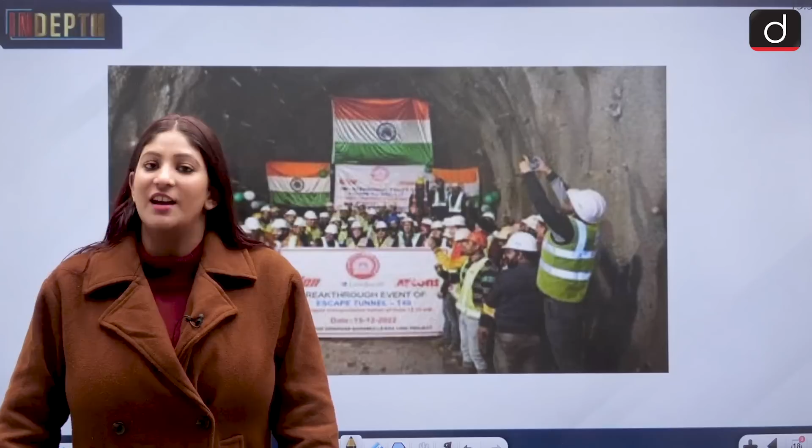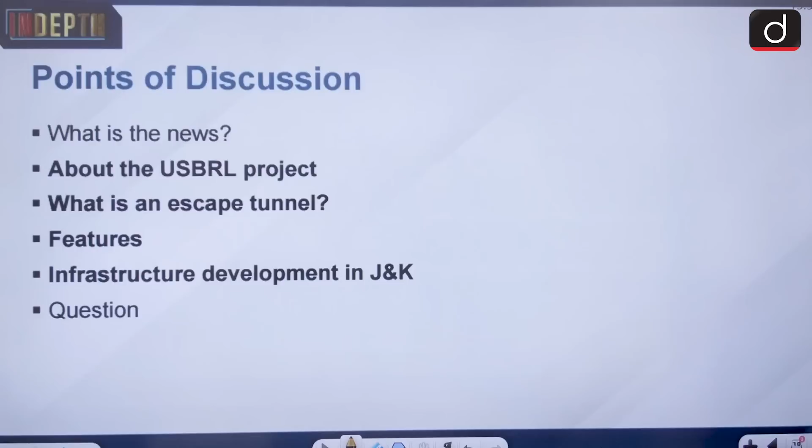India has got its longest ever escape tunnel in Jammu and Kashmir. This achievement has been registered by railways. Let's know how. This topic is important from the perspective of GS Mains Paper 2nd and 3rd, and also has preliminary facts. This segment is pretty data based.

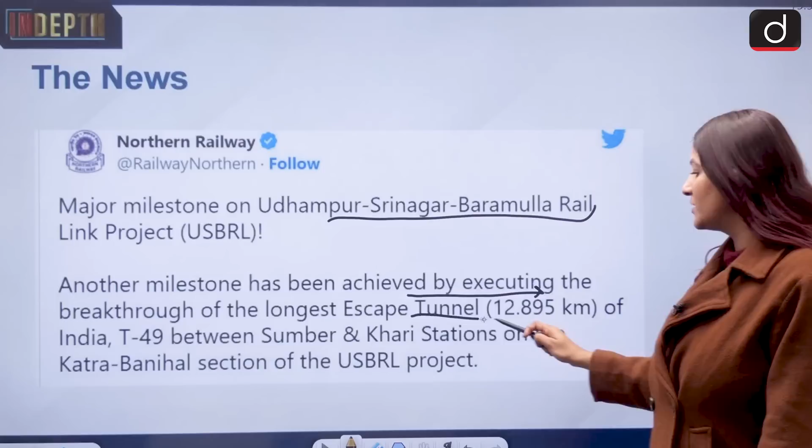Major milestone on Udhampur Srinagar Baramulla rail link project. Another milestone has been achieved by executing the breakthrough of the longest escape tunnel, which is 12.895 kilometers long of India, and it is T49 between Sumber and Khari stations on the Katra Banihal section of the project.

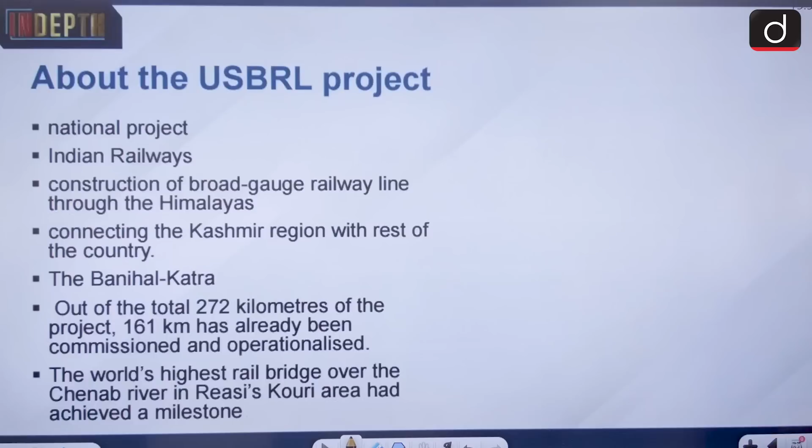Remember these facts. First, let's talk about the USBRL project. It is a national project undertaken by the Indian Railways. This is the construction of a broad gauge railway line which will cross through the Himalayas and connect the Kashmir region with the rest of India.

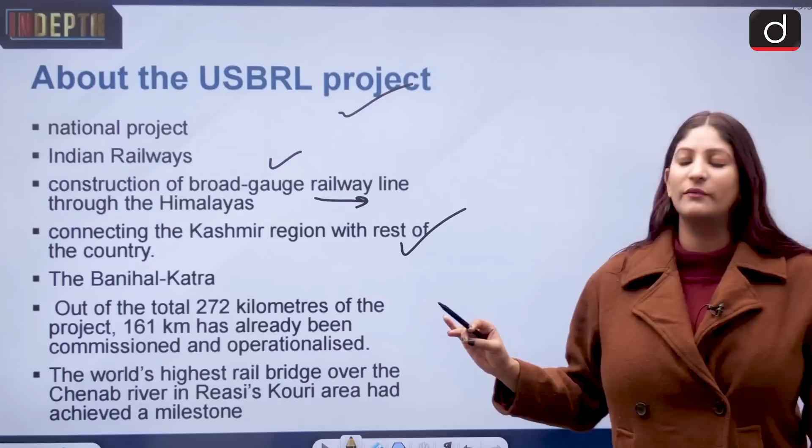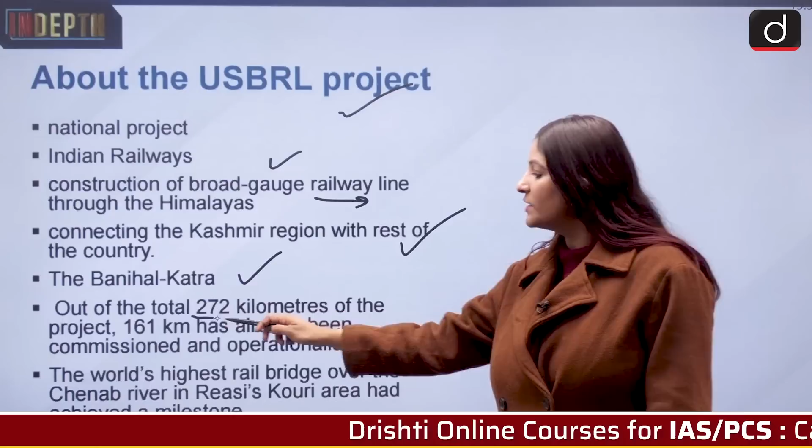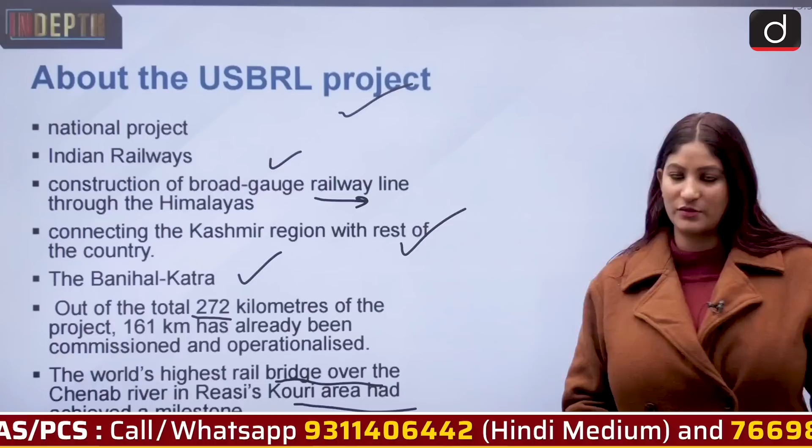This particular section of the tunnel has been built on Banihal Katra, and out of the total 272 kilometers of the project, 161 km has already been commissioned and operationalized. The world's highest rail bridge over the Chenab River in Reasi's Kouri area had achieved a milestone also. So this can be said as a project of milestones.

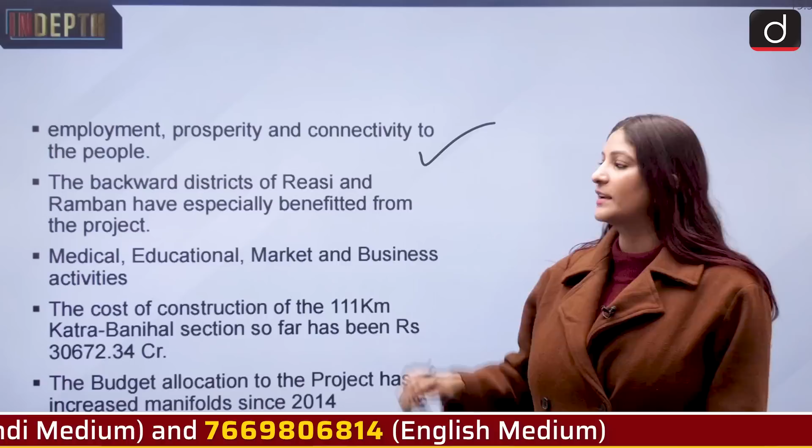Since this project has been launched, the people of J&K have got employment, prosperity, and connectivity, and approximately 73 villages have got the benefits of this project, impacting lakhs of people. The backward districts of Reasi and Ramban have specially benefited. Apart from that, it is also an achievement for medical, education, market and business activities.

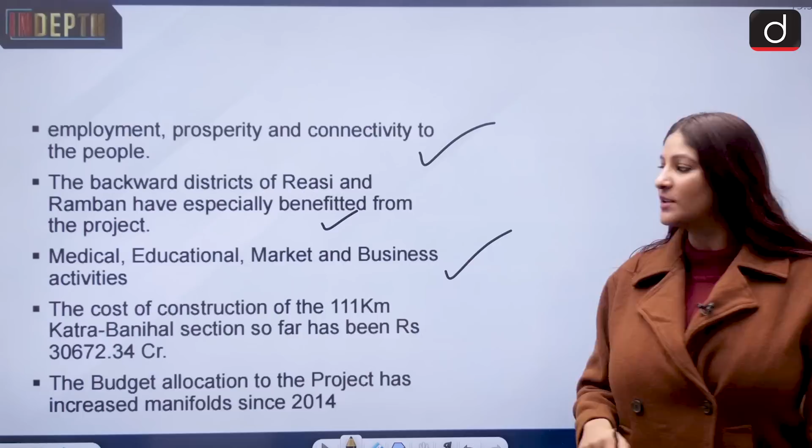The cost of construction of the 111 km Banihal Katra section so far has been rupees 30,672.34 crore. The budget allocation to the project has been increasing manifold since the year 2014.

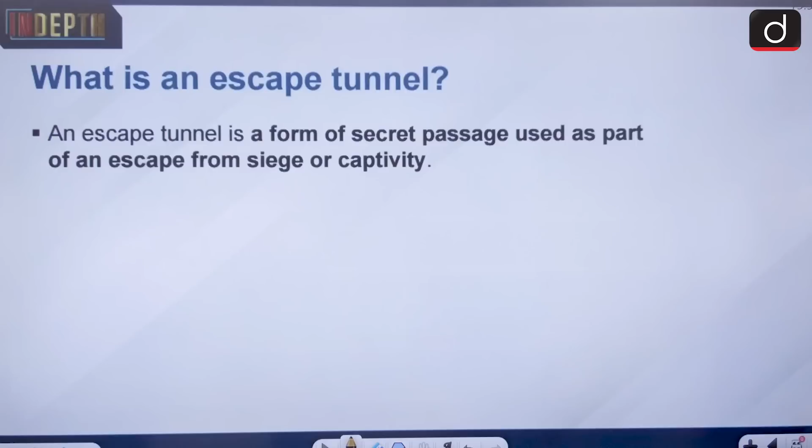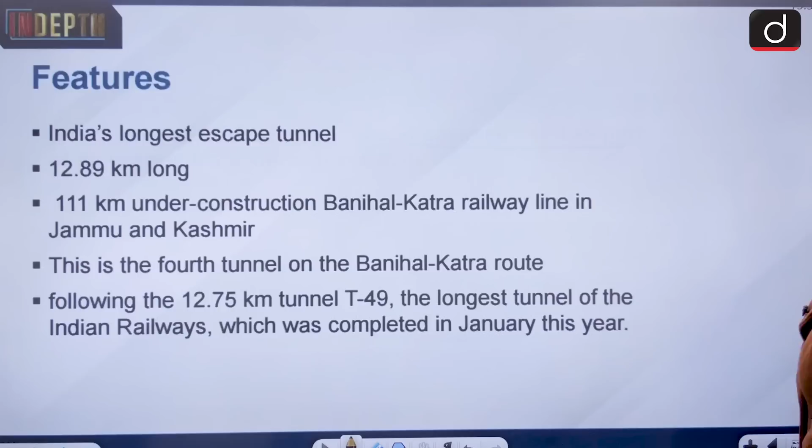What is an escape tunnel? According to Collins Dictionary, it is a form of secret passage used as part of an escape from siege or captivity. This is the generic definition. And if we talk about our longest tunnel, it is of course India's longest escape tunnel.

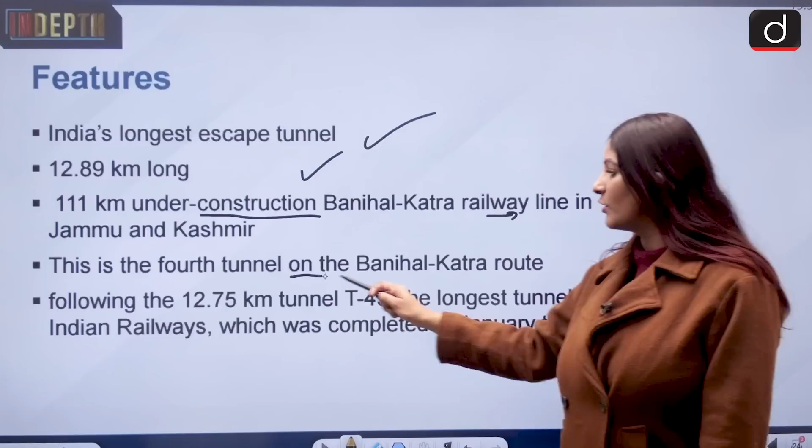It is 12.89 kilometers long in round-up figure. It has been constructed on the 111 kilometer under-construction Banihal Katra railway line in Jammu and Kashmir, and this is the fourth tunnel on the Banihal Katra route, following the earlier 12.75 kilometer tunnel T49, the longest tunnel of the Indian Railways, completed in January this year.

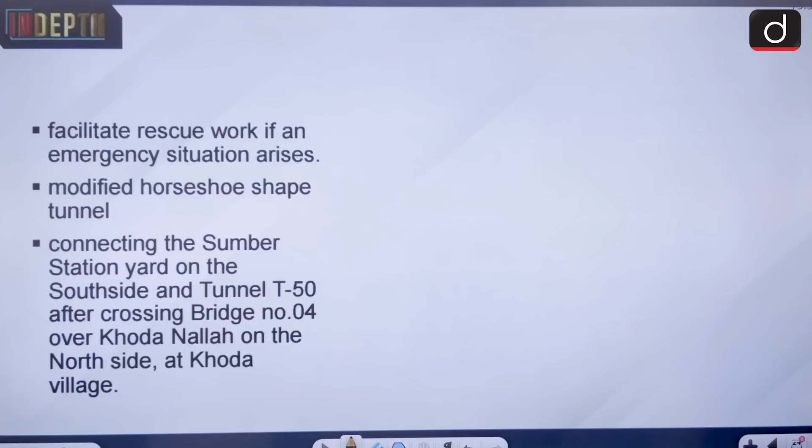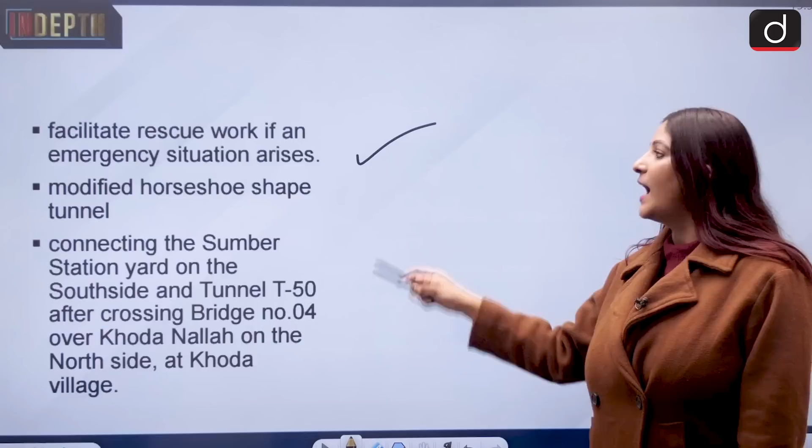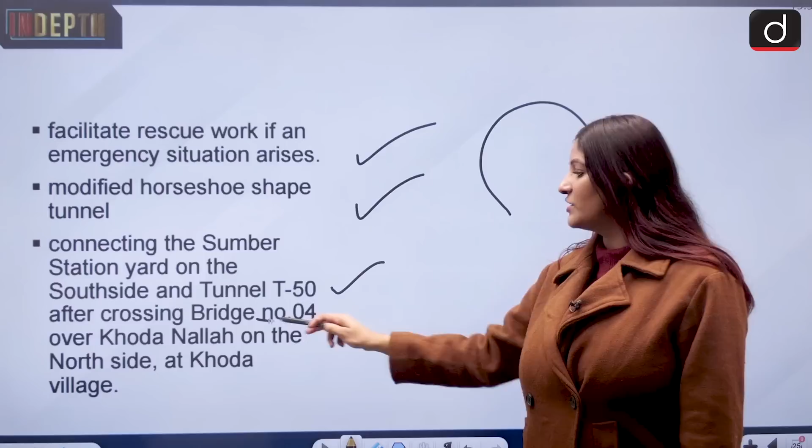Now, what is the aim of this tunnel? It will facilitate rescue work if any emergency situation arises, and it is a modified horseshoe shape. It connects the Sumber station yard on the south side and tunnel T50 after crossing bridge number 04 over Khoda Nallah on the north side at Khoda village.

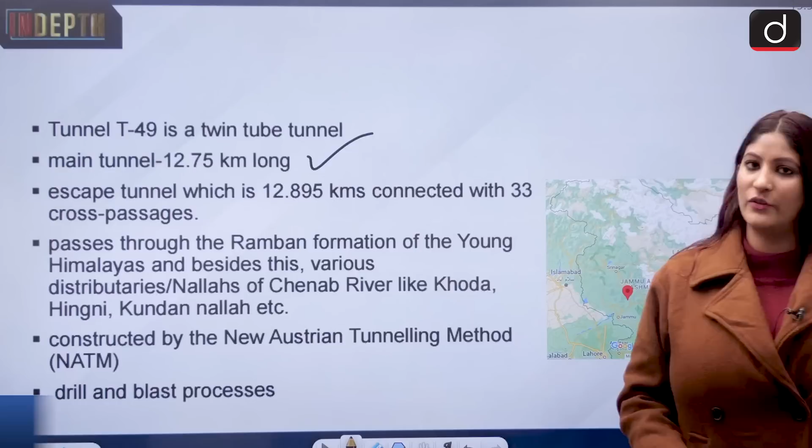This is not very important, but just to have an idea: the tunnel T49 is a twin tube tunnel. It has two tubes, and the main tunnel is 12.75 km long. The escape tunnel is 12.895 kilometers, connected by 33 cross passages.

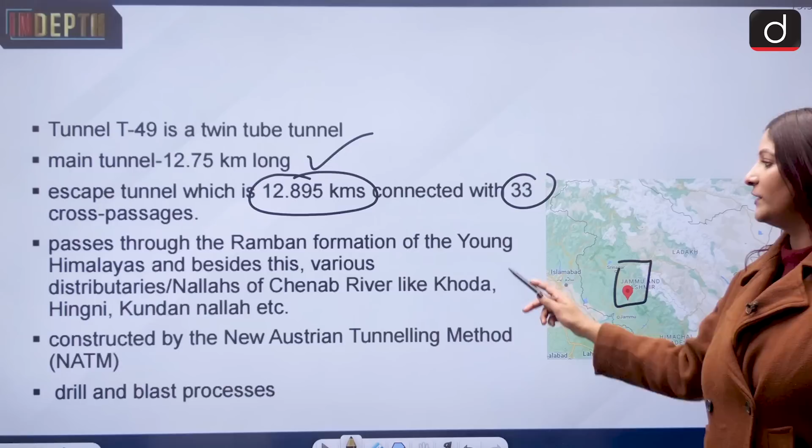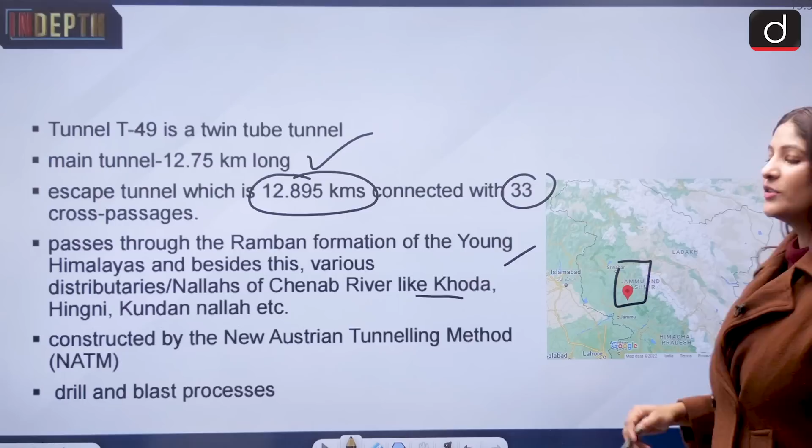You can see the location here. It passes through the Ramban formation of the young Himalayas, besides various distributaries and nalas of the Chenab River like the Khoda, Hingni, Kundan nallah, etc. You can imagine that the young Himalayas are not very stable compared to other sections of the Himalayas.

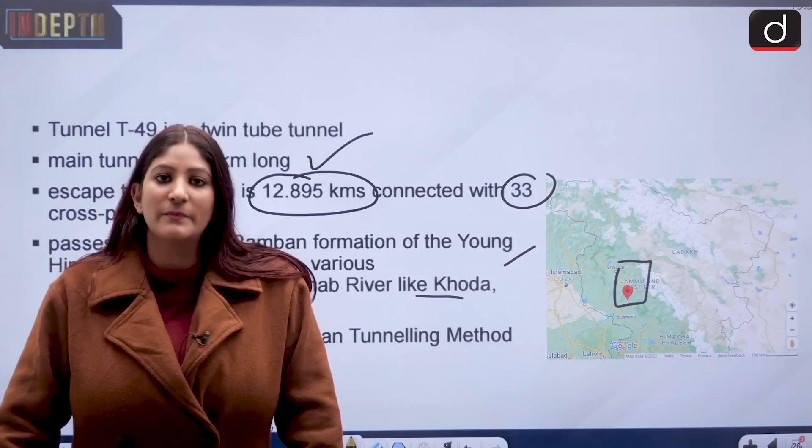So it was a huge challenge to develop the tunnel there, plus not to damage the environment massively. Those challenges have been overcome, and the project used is the New Austrian Tunneling Method, which is a drill and blast process of tunnel development.

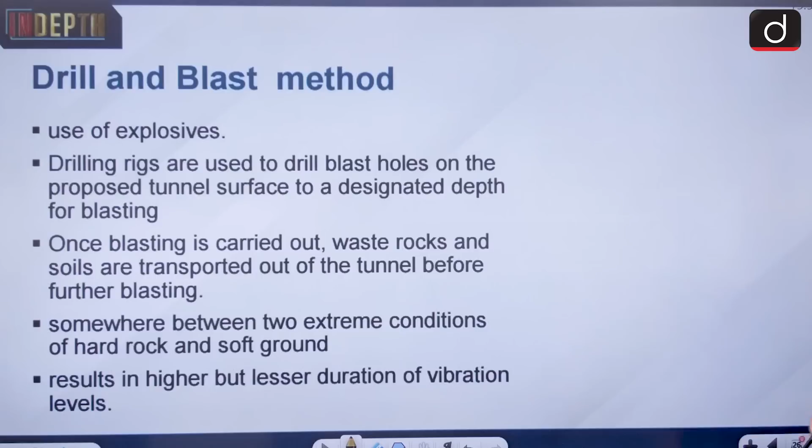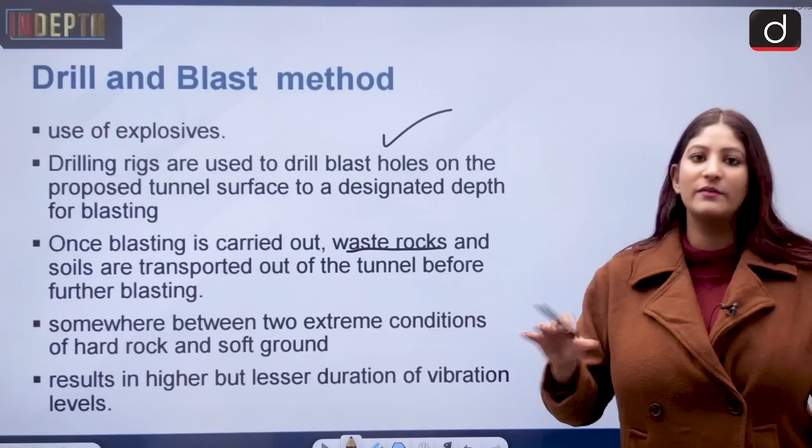In the drill and blast method, explosives are used. First, drilling rigs are used to drill holes so that designated explosive can be deposited there, and once blasting is carried out, the waste rock and soil fragments are transported out of the tunnel before further blasting. This is a very challenging process.

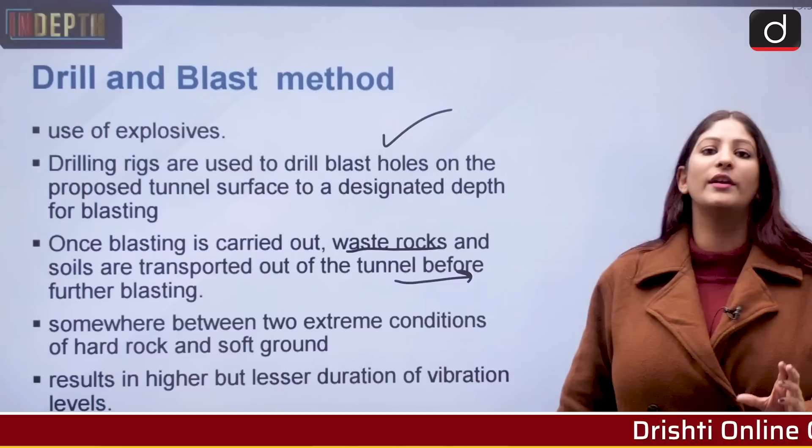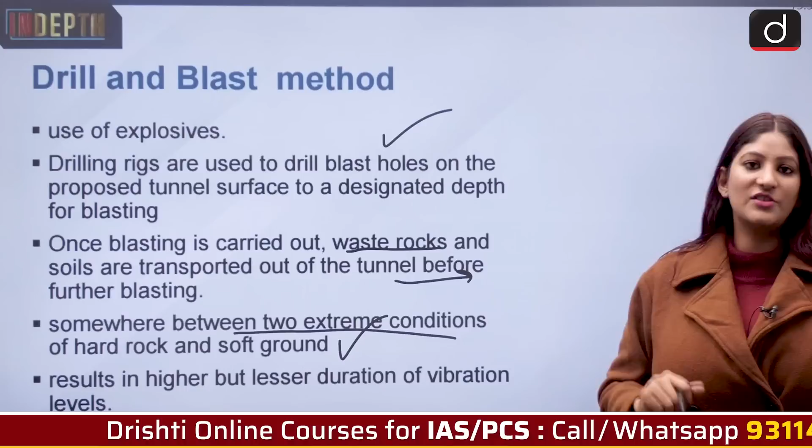This method is generally used on grounds which are somewhat between two extreme conditions: hard rock and soft ground. So this is a pretty challenging project, and it results in higher but lesser duration of vibration level. It is a very sensitive method for sensitive areas.

Infrastructure has been given a boost in Jammu and Kashmir since the abrogation of Article 370. Whenever there is an economic vacuum, radicalization and extremism can easily creep in. That is why infrastructure is getting a boost there: first for employment, secondly to provide public welfare, and thirdly to ensure people get export orientation so they can develop further.

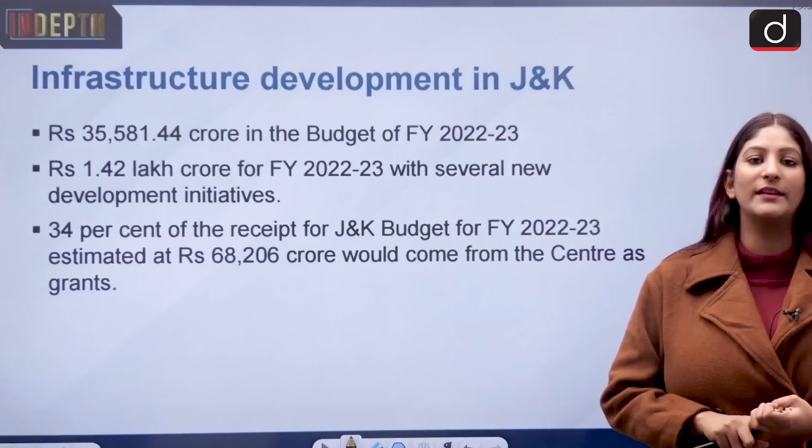Rupees 35,581.44 crore in the budget of fiscal year 22-23 was allocated for Kashmir. Specifically, rupees 1.42 lakh crore for this fiscal year, with several new development initiatives done through important central government grants.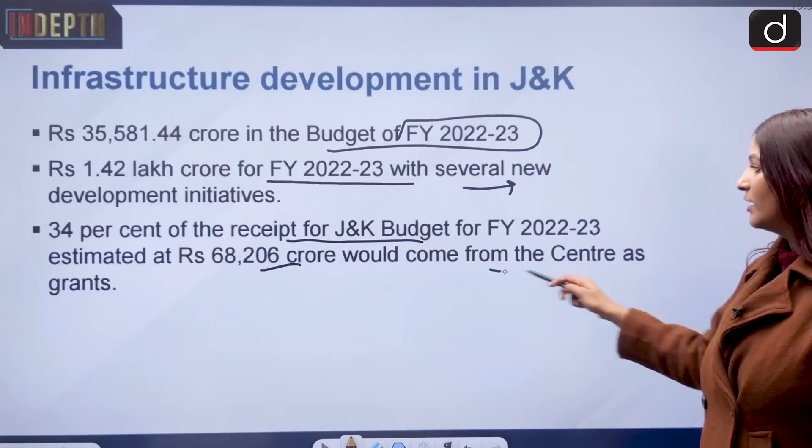In fact, 34% of the receipts for the JK budget for this fiscal year is estimated at rupees 68,206 crore, which will come from the center as grants. So the seriousness of the center is very much evident here.

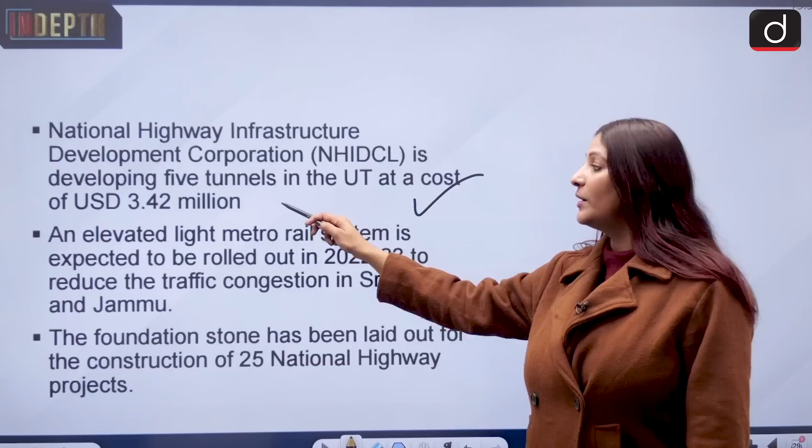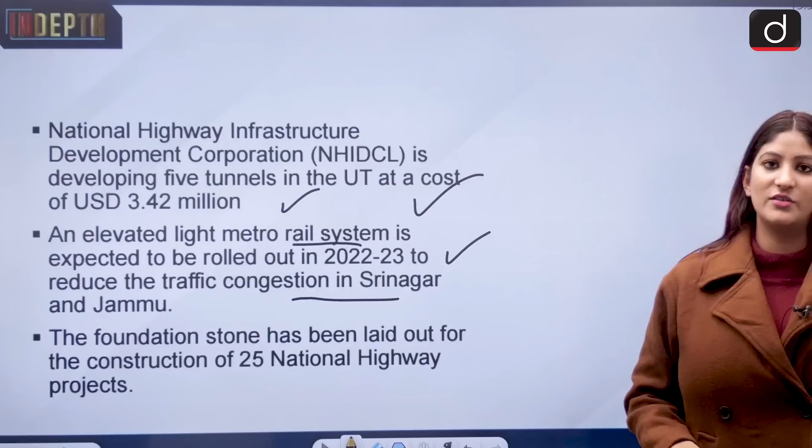The National Highway Infrastructure Development Corporation is developing 5 tunnels in the Union Territory of J&K at a cost of $3.42 million US. Apart from that, an elevated light metro system is also expected to be rolled out this fiscal year, which will reduce traffic congestion in Srinagar and Jammu. The foundation stone has also been laid for the construction of 25 national highway projects.

In March 2022, the United Arab Emirates pledged to invest US dollars 391.8 million for Jammu and Kashmir.

Now we have a question: with reference to the Indus River system, of the following 4 rivers, 3 of them pour into one river which joins the Indus directly. We have to know which river it is. It is a previous year question of UPSC.